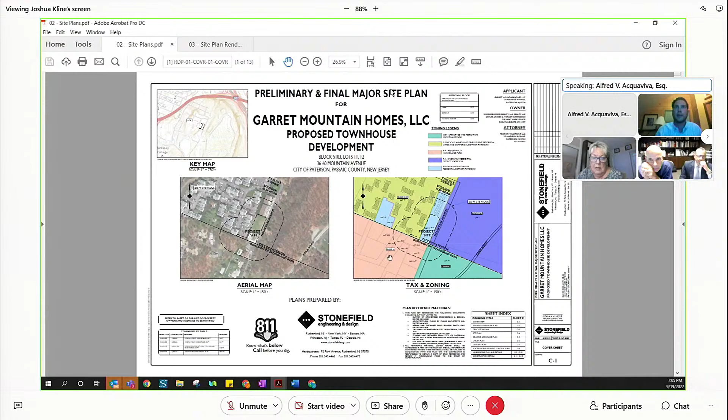This is the cover sheet, sheet C1 of the plan submitted, dated 5/4/2021. I just want to confirm I'm not planning on marking this in as it was submitted, is that okay? That's fine, that's acceptable. Okay perfect, so what I'll do is I'll zoom in now.

I think I always like to start with a bit of an overview. So myself, as a site civil engineer, the items we really look at, which tonight I will go through for the board and the public here tonight - we don't anticipate any adverse impact to the surrounding neighborhood, the adjacent properties, or the community.

I think one of the other things that's important to note in the beginning is that our office and myself are very familiar with the city, and we understand and agree, as a condition of approval, that we would work with the city engineer regarding all of the engineering elements of the design, and we would secure the city engineer's approval and all applicable permits associated with the project.

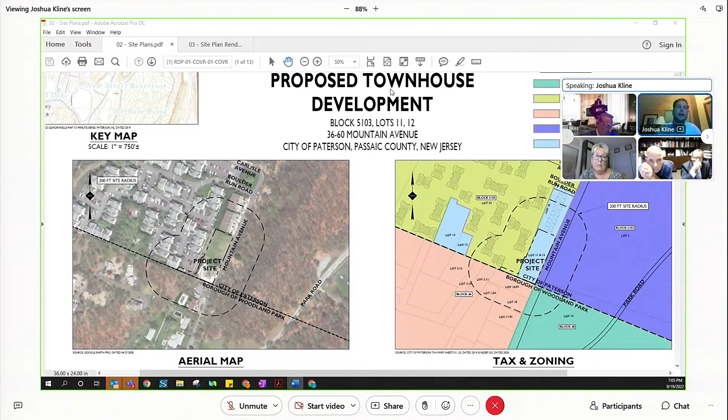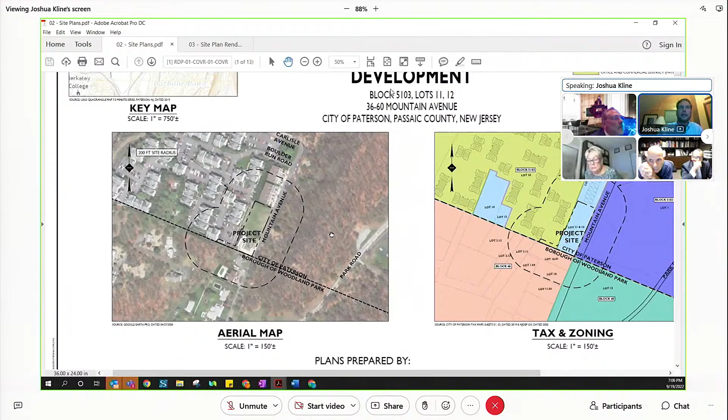So what I have up on the screen tonight is our cover sheet, with an aerial map on the left and a tax and zoning map on the right. I think we were brought through a lot of the existing conditions already, so I'll just highlight some of the key things we look at as a site civil engineer. I'll zoom into the aerial map a bit more, and I think you can see some of the items previously described.

To the left of the page, or west as I'll refer to it tonight, you can see the larger condo association. To the north, there's another townhouse development at the top of the page. To the right is undeveloped area, and to the south is the borough of Woodland Park, where you can see some single family homes scattered in the area shown on the screen.

Our site is fronted along Mountain Avenue, which we'll describe the access to further — it's a two-way street. One of the keys is that the majority of our site does not have improvements along the frontage. There's no ADA compliant sidewalk, no curbing, and no designated frontage improvements — just some old boulders and broken up area.

The site is mostly undeveloped. You can see the north half is vacant or open space, and there was an existing development described to the south. I think some of the key features to take away as we go into the proposed condition is, first, the topography.

This changes about 15 feet from north to south along Mountain Avenue — as you work your way from the top corner of the page to the bottom, there's a 15-foot drop in elevation. There's also a big elevation difference west to east. The development behind us today is about 5 feet higher at the north, and to the south it ranges up to about 20 feet higher than us.

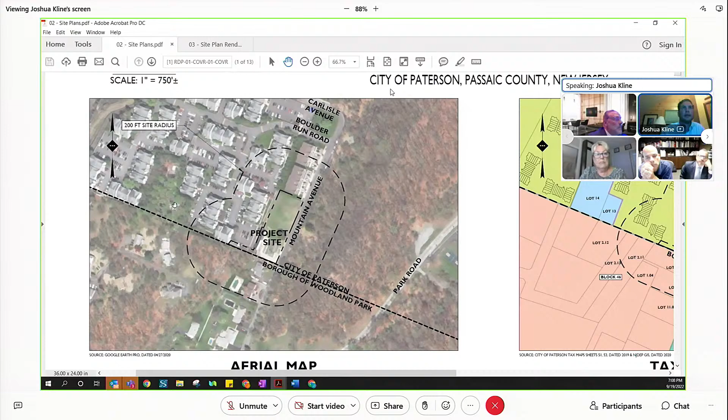So there are definitely some challenges — it's a unique site. When you look at the geometry, yes, it's a rectangular lot, but it's really shallow in depth and has a lot of grade change across it, which makes the engineering and design difficult in laying things out. Another note is there are no stormwater management facilities on site — water hits the ground today and goes uncontrolled off of the site. And I already noted the frontage condition for everyone.

So now I'll move to this exhibit, which I'll mark as A1 — a site plan rendering exhibit, dated 9/15/2022 for the record, prepared by our office. This is a colorized site plan that takes the site plan as submitted and the landscape plan as submitted, combines them together, and colors them.

I'll zoom in, and just to orient everyone — the top of the page is north, the bottom is south. Again, you can see Mountain Avenue on the right-hand side, or to the east. Just to highlight the big features: we have four buildings as you work your way north to south, building number 1 at the top, building number 4 at the bottom.

There are 2 access points along Mountain Avenue, in accordance with city standards as well as general RSIS standards in terms of access aisle width, parking space depth, and sizes. I'll zoom in to just building 1 — it has 4 units as you work your way from right to left, or east to west.

You have 2 spaces in front of each unit. You have stairs to get up into the entrance as shown, and then there is a single garage.

Our architect, Mr. Evans, will be speaking later. He'll describe the buildings in a little bit more detail, and there also will be a traffic engineer, John Corak, from our office, who will speak more to the parking, the access, and the general traffic operations of the site.

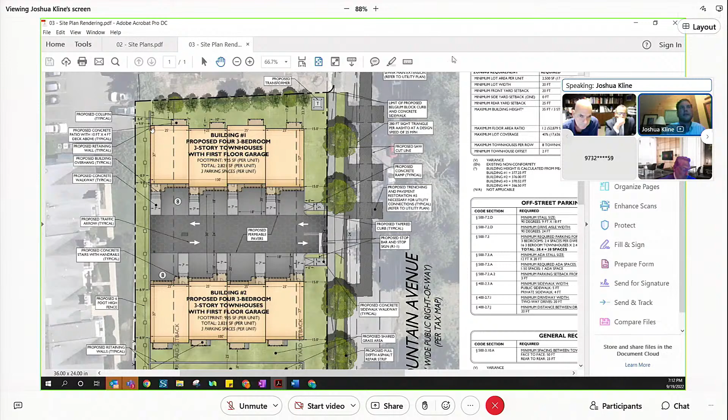As you can see to the north, we have new evergreen screenings being planted. There's a 0-foot side yard setback requirement. The applicant is 12 feet from the elevated patios' columns, but about 15 feet from the building, so there's a nice little grass area between the back of building 1 and the property line.

Again, there's no side yard setback along the bottom of the page, or to the south, but the patio and stairs are 13 feet away, and the building at its closest point is 16 feet. That creates some open space between this development and the rear property lines.

Our planner will go in depth with the variances we're seeking tonight. I am familiar with and have looked into the setback variances associated with the application. What we look at as site civil engineers when discussing setback variances is what elements we design that would be impacted.

One of the things we look at is stormwater, utilities, and constructability. Based on our review of all these items, they can all be safely accommodated, so this relief can be granted by the board, and this project can safely accommodate that from a site civil engineering perspective. We have stormwater features that exceed the requirements of the NJDEP as well as the city.

We have adequate spacing to provide utilities. Again, we're permitted to build right to the side yards, but we're not doing so. Our planner will speak more to that - I just wanted to touch on what we look at as a site civil engineer, and one of the items we noted is a little bit conservative.

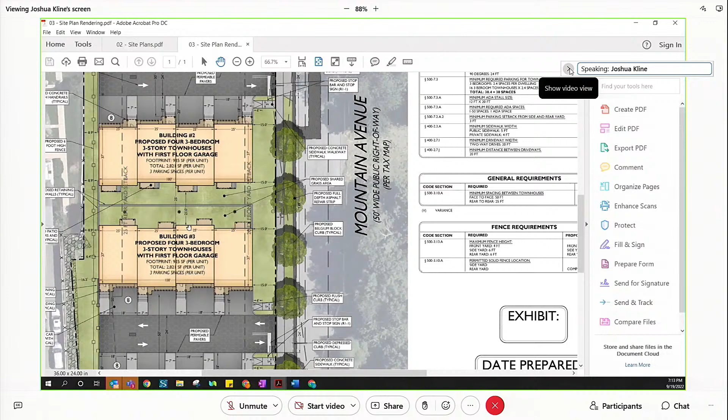So there's a 25-foot space requirement between the townhouses, rear to rear. We noted 21 feet because at the pinch point, where one of the raised patios is to the back of the building, is 21 feet, but building to building is 25 feet. So the intent of that spacing is met, from back of building to back of building.

I'll just highlight the stormwater, I'm happy to go into more depth. This is a major development, so we are subject to the NJDEP regulations that were in place at the time.

What this project looked to do is incorporate pervious pavement within the driveways. Water will be pitched in, the roof leaders would be connected, and water would be contained within these pervious pavement stormwater systems. Then through an outlet control structure, it would be slowly released. During larger storm events, water would bubble out of the grate and make its way to Mountain Avenue, which again is water that comes off the site uncontrolled today.

In terms of lighting, we are proposing new lighting as part of the project, and we are complying with the lighting requirements. I think the key here is we want to provide safe lighting for our future residents, but we want to minimize any potential impact to the surrounding areas. We're very aware that there's residents surrounding the site, single family homes as well as townhomes and a condo association.

So what we look to do is keep the fixtures very low. We don't have any area lights associated with this project. The mounting height of the canopy lights is 9 feet, and the wall sconces are 6 feet. For reference, it's very low, which keeps it at a pedestrian level.

This is all LED, it's all downward facing, and it's all dark sky compliant, full cutoff LED fixtures. The biggest key there to end with is there's absolutely no spillage on any adjacent property with the proposed lighting. Again, our focus is we want safe lighting for our future residents in the areas that they park, accessing Mountain Avenue, which is provided. And again, we do meet the lighting requirements as noted.

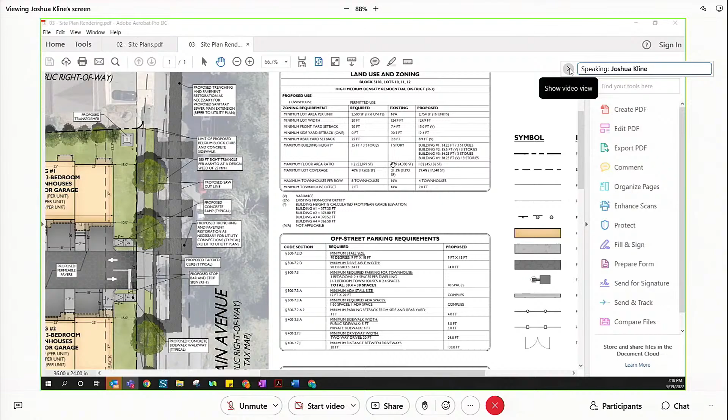Mr. Kline, there is a height variance for one of the buildings, is that correct? Correct, there is. What is the reasoning for that variance? There's a very small de minimis height variance for building number 2, it's 6 inches. There's a height variance of 3.33 feet for building number 4, and that really comes from a grade calculation. We have to calculate the mean grade around the building. The front of the buildings are all consistent, but as the site is dropping north to south, as you work your way to the back of the building, it is a little bit lower. So when you take that mean grade, there is a slight height variance we are seeking as part of the project, due to the grade, the topography of the lot. Correct, that is correct. Madam Chair, I have no further questions of Mr. Kline at this time.

Okay, Mr. Buglione, do you have any questions of Mr. Kline? Yes, Madam Chairwoman, thank you very much. Good evening, Mr. Kline. You had testified that you have a familiarity with the city of Paterson.

My focus for this question is, how many other projects have you represented landowners who were attempting to build adjacent to a park? So I don't know how relevant this is to this application, but our office did work on, I'm just pulling the name of the project we did. I wanted to focus on you first. How many projects did you personally work on for a Paterson landowner attempting to build next to a park?

Yeah, one sec, so we did. Are you looking at documents? If you're looking at documents or using your computer, you'll have to tell us. No objection, Mr. Aquaviva. Mr. Kline isn't even allowed to get his sentence out, and it's happened twice already, so if there can be some courtesy to the witness, please. I just need a second. This is cross-examination, and I have a witness utilizing a computer. Excuse me, I want to say something, okay? Because the stenographer has to take the words as they come out verbatim, we cannot have people speaking over each other or interrupting each other. So I am going to ask for the courtesy, just let the gentleman answer the question and then you can respond, please. Thank you, go ahead, please.

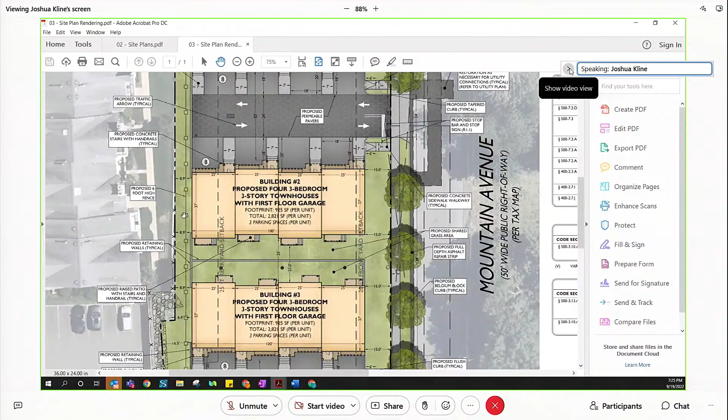There's a slight jog in the property line, so at the closest point it's 6.4 feet. To the north of the page it's 6.4. At one point it's approximately, I would say, about 12 feet away. And then as you work your way to the bottom, again it's about 6 feet away. So it's kind of inward onto our property.

Is it fair to state that there's a staggered line for the fence, and at one point it'll be 6 feet away from the buildings, and at another point 12 feet, based on that testimony? No, the fence runs in a straight north to south pattern. It's equidistant from the proposed buildings 1, 2, 3, and 4. Again, the 6 foot mentioned is from the fence to the property line, not to any buildings on the adjacent property.

So there's extra space on the other side of the fence that goes to the property line? Correct. There is a fence, and then from the fence to the west there is approximately 6 feet to the property line, and in some areas greater than 6 feet.

Does the placement of the fence restrict any access for equipment to the rear of the buildings? What type of equipment? Say a crane to remove a tree or a bush, or to place an air conditioner. I don't believe it would impact the ability to do the items as you described. How about a different scenario, would the placement of the fence hamper a fire apparatus from going to the rear of the building? No, it would not. And what's the basis for your opinion on that?

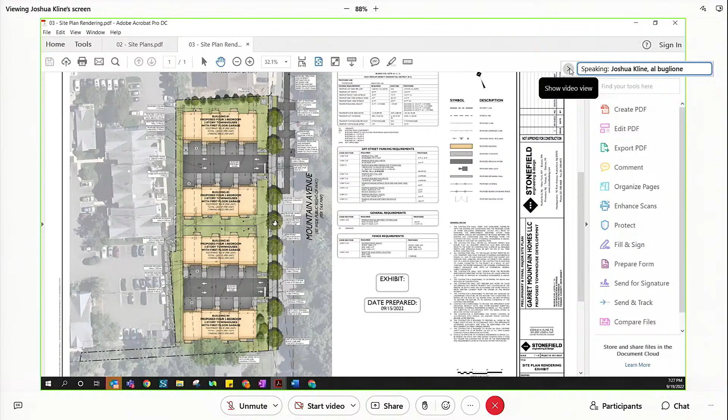Again, a fire truck would be able to safely turn into the site from Mountain Avenue, and they would be able to pull into the driveway. Again, I'm not a firefighter, I'm just an engineer, so I can't speak to how they would stage or be able to handle the situation.

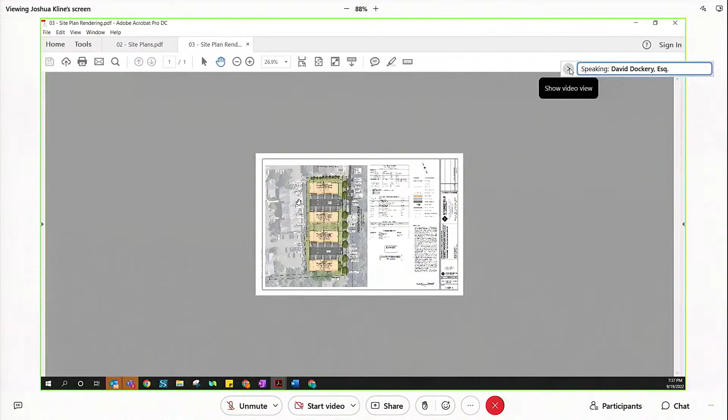Let me make sure, you're referencing the property to the north, the eight townhomes, correct? I'd just like you to compare, if you know, the difference in setback. It appears on the plans that the narrowest setback to the north of the subject development is 8.9 feet to the Garrett Heights property line. What is, if you can provide it, your opinion on the approximate setback from the rear of the townhomes to the north?

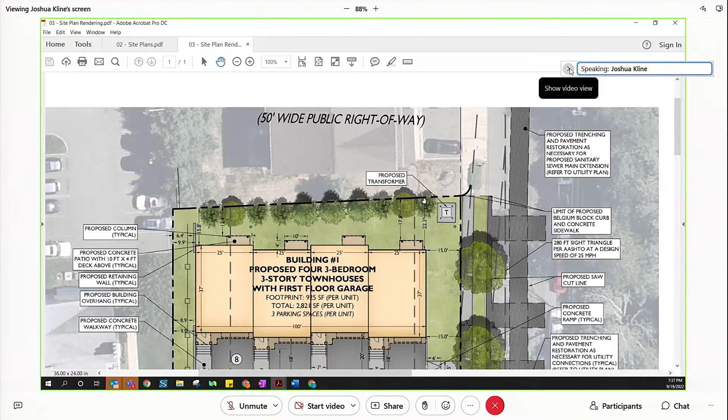Got it, so to the north, I'm just going to zoom in. That would be between building number 1. So from the building to the property at the closest point is 15.8 feet, and at the furthest point is 22.3 feet. I'm just going to check, usually I have a scale on me in person.

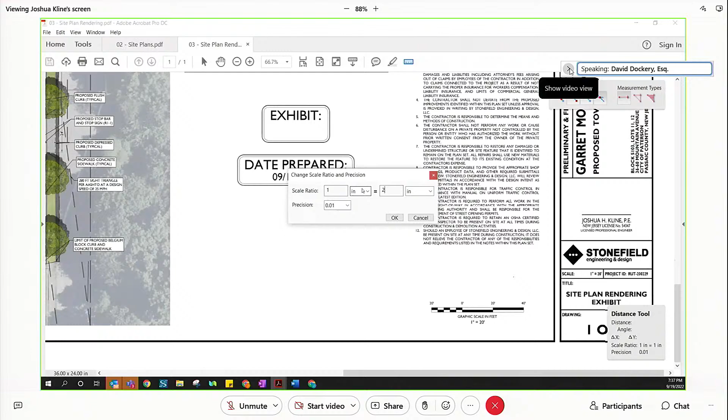Well, that's not exactly what I was asking. I was asking about the rear line setback along the Garrett Heights property line. Got it, I just want to make sure. I thought the first question was about the property to the north. Well, right, so let me be as simple as I can. If you look to the left of the subject property, the setback between the subject property and Garrett Heights property line is 8.9 feet, correct?

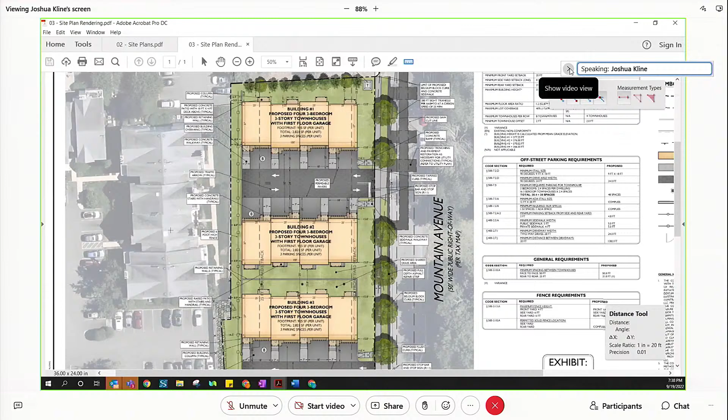Oh sorry, you're referencing the development to the west, to the left-hand side of the page? Let's say to the left, that might be easiest for our purposes. To the west, correct? Yes, yes, correct. Okay perfect, so that's 8.9 feet at its most narrow point.

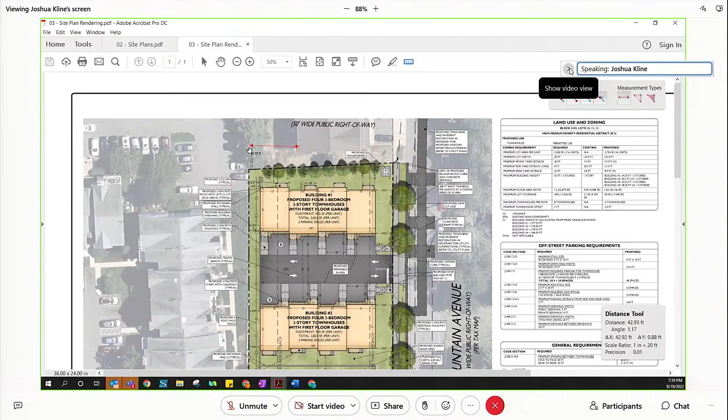So if you move north to the Garrett Estates development, would you be able to provide the approximate setback from Garrett Estates to the west? Well, I'm really not following you. If you take, maybe in a different way, sorry, if you take the back of Garrett Estates, the development to the north, and estimate the setback from the rear of that building to the Garrett Heights property line to the west, approximately what is that? Oh got it, so you're not talking about our property, you're talking about the adjacent property. Correct. Got it, it's approximately, I'd say 40 feet, 43 feet.

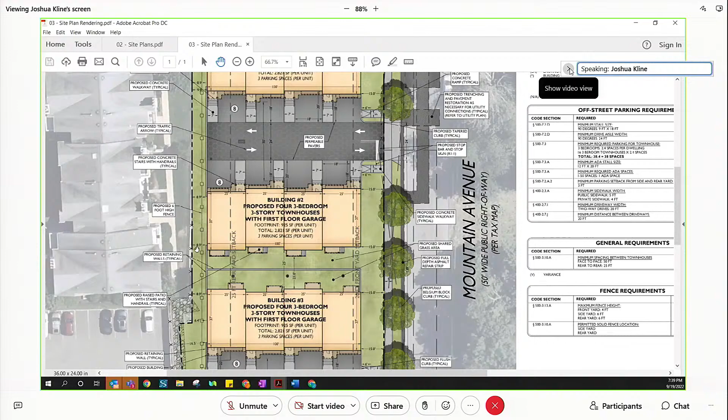Okay alright, that was already asked. Along the rear setback between the subject property and Garrett Heights condominium to the west, particularly along the most northern and narrowest part, in addition to a fence, is there any retaining wall planned for that property line? There's no retaining wall proposed on the property line. The project does propose retaining walls measured at about 9 feet, shown about 8.9 feet from the property line.

And in the current conditions of the property, there's a steep drop-off in topography from the west as you go onto the subject property. Where does that fall on the plans? Correct, so at the north corner there's about a 5-foot difference in elevation, and as you work south it ranges from about 15 to 20 feet depending on how you measure it. And so is the purpose of those retaining walls, you said the west end of the buildings is meant to serve as a retaining wall?

Is that meant to abut that topography difference, or will there be infill to transition? So there will be a slope between the property line and our buildings, the westerly facade of our buildings. So the fence will go on top of the retaining wall, so to speak? Correct, it'll be on the higher side of the parking areas.

Okay, and is there any landscaping planned along that westernmost boundary? Currently the plans do not propose any new landscaping along that fence. And is there any current screening or landscape blocking presently on the site? I don't believe there's any landscaping screening on our property that's there today. Okay, and again, I don't know if you can answer this, but if you can, great - would you be able to testify as to any logistics for construction staging for the development? I would not.

So you can even see on the north-hand side of the page, this car - again, you don't have this car now having to back out into the road. Anyone that's backing out of their driveway is doing so kind of in the safety of the community that they're in.

I have no further questions.

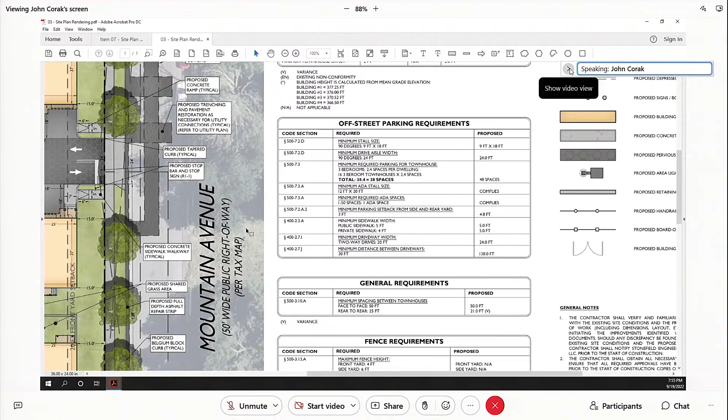Good evening, Mr. Corak. Previously, you said there was a site visit to the property. Did you make that site visit, or was it another member of your firm who made the site visit? I made a site visit, as well as another member of my firm. Can you kindly tell us the day of the week and the date that you made your site visit? I don't have the date offhand. It was a weekday in March.

We prepared this study at the... You had stated your report is dated March 31st, 2022. Would it be consistent about a week before that? Correct. Can you tell us the time of day that you appeared at the site for your site visit? It was about mid-afternoon. And how long were you on the site? About 30 minutes.

And you had told us that you used a standard for trip generation to determine there should be about 6 vehicles, give or take, per hour for trip generation at peak time. Correct. Can you kindly tell us, in your analysis, what you determined to be the peak time for trip generation? Yeah, so the peak hour, regardless of the specific window it happens, generally speaking we look at a 1 hour period between 7 a.m. to 9 a.m. and a 1 hour period between 4 p.m. to 7 p.m. So the trip generation associated with the project would fit into the busiest hour within that window.

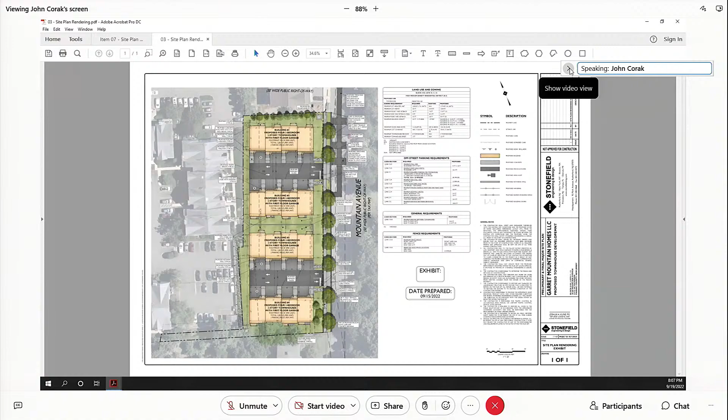Yeah, so what we like to do for these planning board presentations, to help the board and the public understand what's being shown on the screen instead of just black and white plans, is take that site plan document and provide color on it. That way you can differentiate the buildings, the driveways, the landscaping areas. All of those components are easier to see, but dimensionally and from an engineering perspective, this plan is exactly identical to the site plan sheet that was part of the package submitted. This is the site plan sheet, C4.

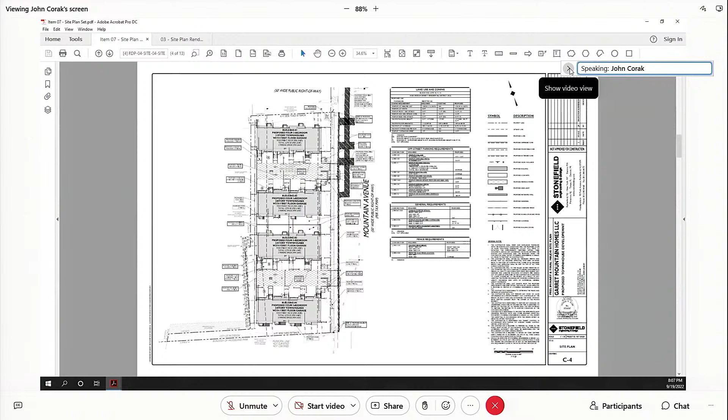So is it your testimony that, aside from the color shading, the plan in front of us right now, prepared September 15th, 2022, is the exact same plan that was submitted to this board in support of the application? Yes. Thank you, Mr. Corak.

Mr. Buglione, your objection is certainly noted. I believe he's cleared it up, I'm not sure to your satisfaction, but he's cleared it up. No, we're going to make a motion to dismiss the application as incomplete, and it can be resubmitted. We feel we would have to study this more. There's no reason why we weren't provided this particular document, especially given it was only prepared 4 days ago. But I do understand, Mr. Acquaviva, I just wanted to state that for the record.

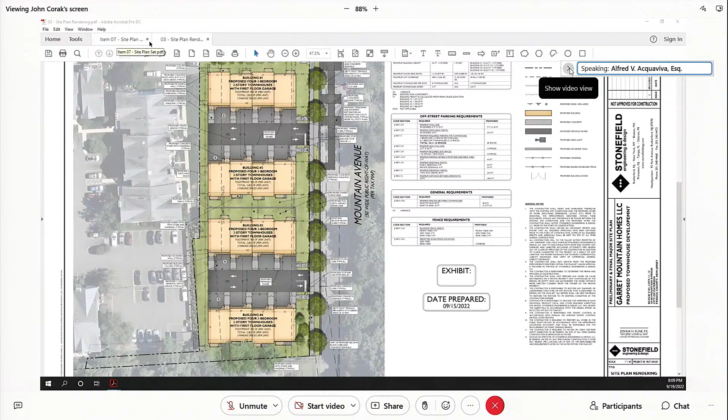I'm looking at my notes here. Mr. Guzman has two more witnesses, I believe. Yes, that's correct. Okay, but actually we're going to take questions from the public at this point, I'm imagining.

I am going to take questions on Mr. Corak's testimony. I also understand that we have one person who has a question for Mr. Kline, but I will save that for after the questions of Mr. Corak. So at this time, if anyone in the public has questions, only on the testimony of Mr. Corak, please call in at 973-321-1579, Meeting ID 711-680-001. I will allow two minutes for call-ins, three minutes for questions, and the questions must be to Mr. Corak based on his testimony.

Do we have any callers that want to ask Mr. Corak any questions? Madam Chair, I have two callers that will call in. We'll call them by name and ask if they have any questions.

Miss Monica Herschel. I don't see her name up here on the screen. Her name is Monica Herschel. Okay, is she on the line? That's what Ryan said. We must have lost her. We'll get back to her, see if she comes back on.

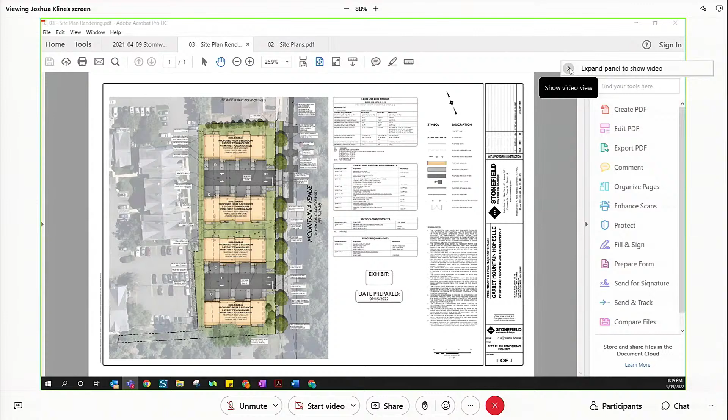Okay, and I'm going to ask Mr. Kline if he can electronically sign them and email them to me, and I will add it as an exhibit to the file. And if you send me a copy, I'll attach it to the transcript. Yes, I will. If possible, if you could print it out as well and mail it to me, an original. We will send hard copies as well as the electronic versions.

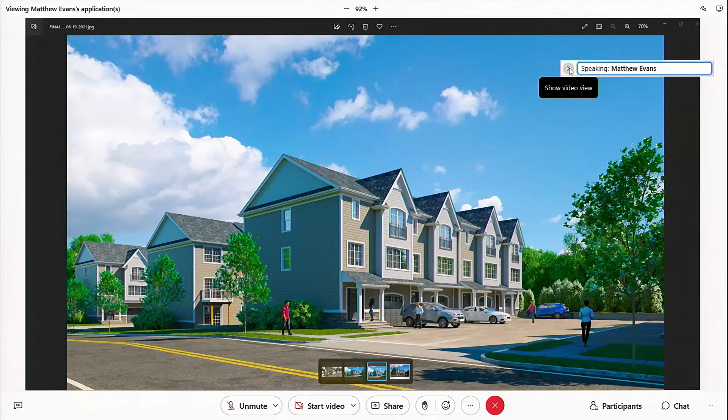Okay, I'd like to start off with the rendering that we've done for this project, which we've submitted as part of the application. Let me see if you can see it. Yes, we can. Okay, so this is basically looking at it from Mountain Avenue. We have the townhouses, 3 of them shown. This would be the upper driveway to the right side of the rendering, illustrating the materials and the scale.

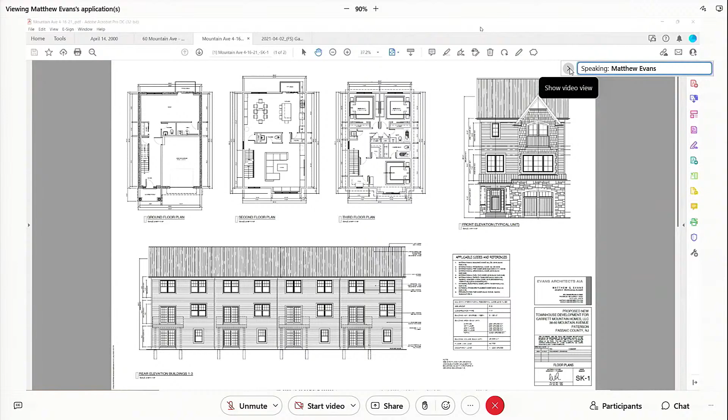I can also share the architecturals. Give me a second here. Okay, so we have a two-sheet submission, SK1 and SK2. Those were submitted as part of the application. Let me get the date from the right. 4/16/21. So looking at the sheets, we have two sheets, SK1 and SK2.

Looking at the units, they are typical. Each townhouse is basically a single family townhouse, so from the ground to the sky it's one unit, consistent with normal townhouse design as a single family dwelling unit. We approached it as townhouses because we felt that the townhouse design is similar to the townhouse style of the neighboring properties, consistent with the scale, density, and character.

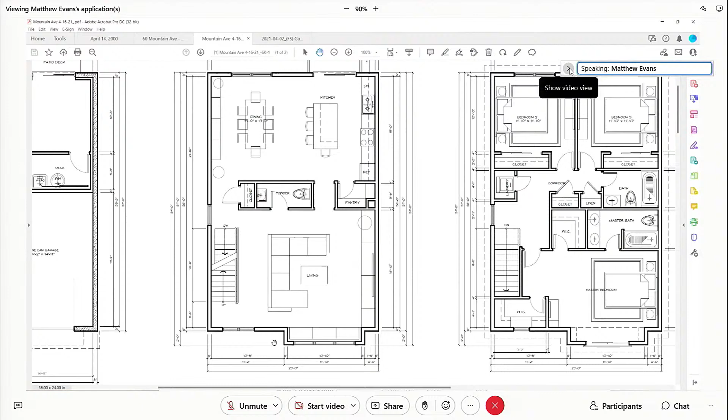Going to the next plan, the second floor plan, you come up the stairs and enter into a large open living room. We have a powder room, a pantry, and in the rear section of the townhouse, there's a large open dining room and a kitchen with a nice island and seating around that, and we have the kitchen cabinets on the right side of that.

And we have a deck also from the kitchen, a little 4-foot deep deck that goes outside for the kitchen area. We have the top floor, that's the 3rd floor plan.

You come up and we have a stackable laundry room. We have 3 bedrooms. So all those bedrooms, we show the furniture in the bedrooms, so you can see how it can fit a queen-size bed in all these bedrooms, along with night tables and bureaus, etc. We have closets, ample closet space for each of these bedrooms.

And then we have linen, a regular closet, and then we have a shared bathroom for those 2 rear bedrooms. And then in the front, we have a large master bedroom with walk-in closets, 2 walk-in closets, and a master bathroom with a tub, toilet, and 2 sinks.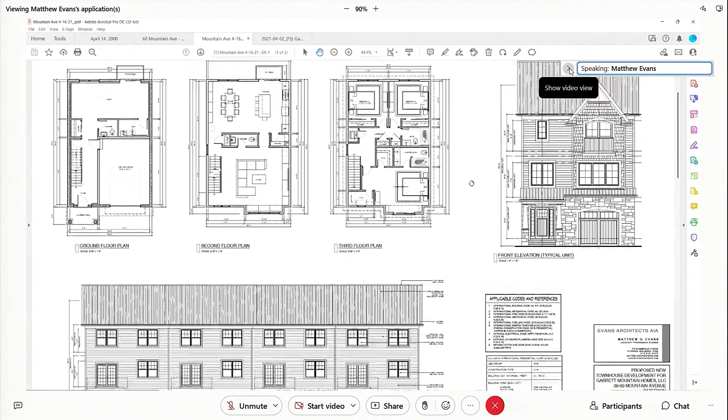Looking at the elevation, the front elevation of a typical unit, let me go to that. So you can see how we mix the materials. We wanted to give it some aesthetic appeal. We have a mix of shaker style shingles, and then horizontal clapboard siding, stone veneer on the ground level, along with a craftsman entry and a craftsman garage door, along with those aesthetic improvements on what we're proposing.

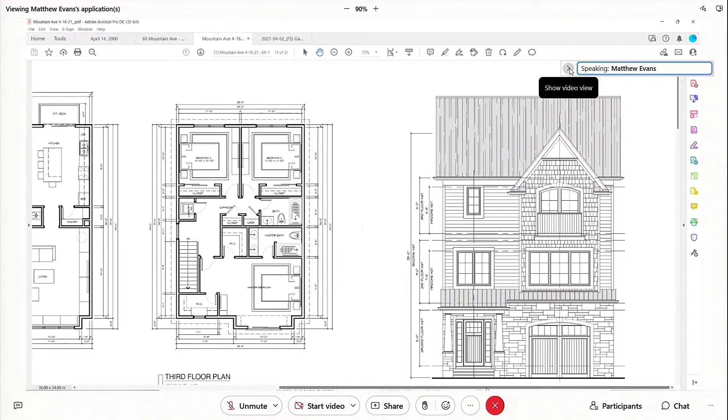Going down the page, we show the rear elevation of buildings 1 through 3. And as I mentioned, we had the deck, the patio, and then the deck above for the rear sections of those. One thing I didn't mention is that all these units, every other unit, will be stepping 2 feet.

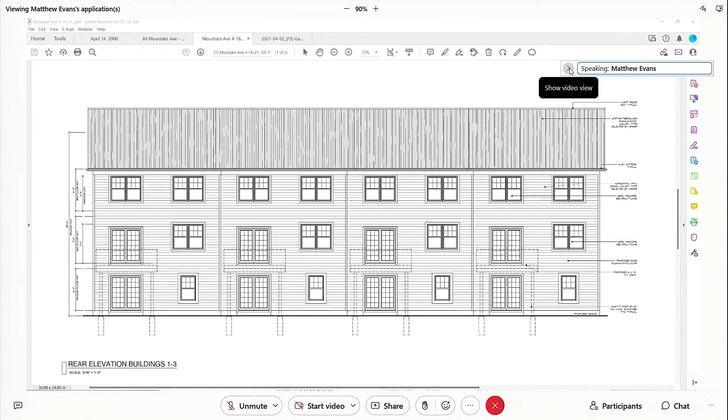So it breaks up the facade. And as you saw on the rendering, it would step back 2 feet to give it not a monotonous look, but to give it more aesthetic curb appeal character.

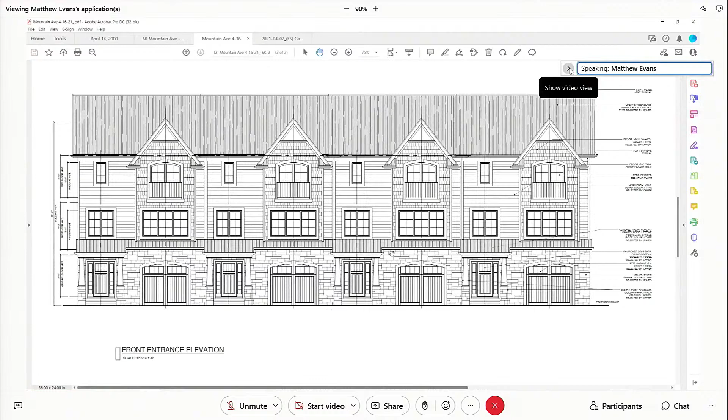Looking at the front entrance, that shows the 4 units together, and shows how the materials and the scale of those buildings complement each other. I think then we just show the side elevations. The left side elevation and the right side elevation are pretty similar in character.

Now, with the difference of building number 4, where it was mentioned previously about the elevation change, due to the elevation it's a little taller in the rear of that unit, with that block there. So we would have some steps going up to that level for the ground floor level on that one.

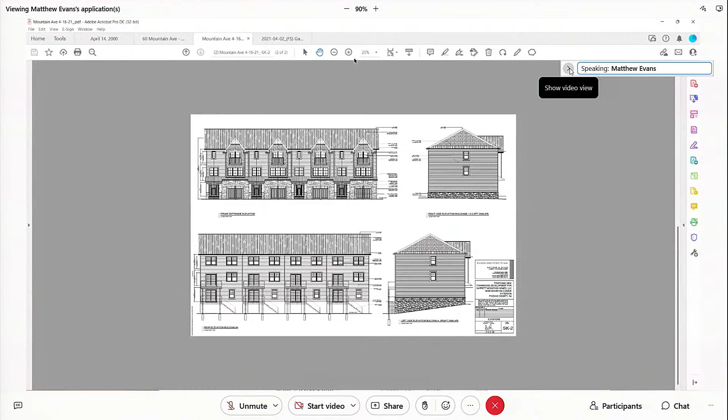So looking at that, those are basically the 2 sheets submission showing the preliminary architectural plans for the development. That would be consistent with all 4 buildings, those plans and elevations, and also the rendering.

So, Mr. Evans, there was a previous question regarding construction staging. Would you be able to comment on that with this project?

I don't know exactly how, but it's standard construction. I don't think there would be any impact on the neighboring properties. A lot of these developments that we do in Paterson consist of 0 lot line conditions, mostly downtown or in the denser areas where you need to shore up buildings or other conditions. This, I believe, would not negatively impact the surrounding properties and would be standard construction.

We've done similar townhouses built in North Haledon and Ramsey and other parts of New Jersey and Waldwick, and this is consistent with those types of units. We've never had any problem during construction with these. They're single families, so I don't see a problem with it.

Okay. Thank you, Mr. Evans. I have no further questions of Mr. Evans.

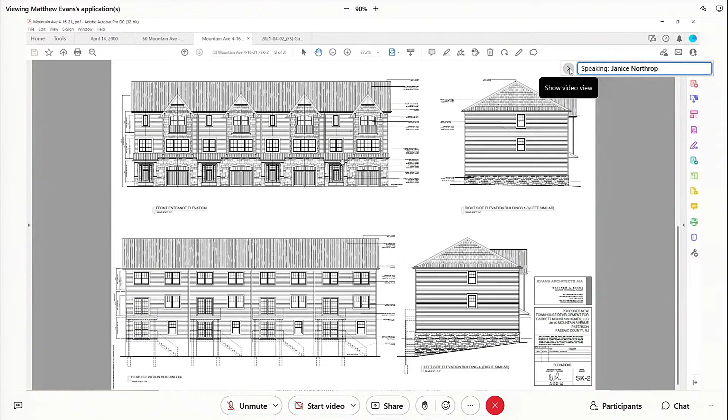Okay, so I'm going to open up the questions. Mr. Baglione? Yes, thank you very kindly. Good afternoon, rather good evening, Mr. Evans. Can you kindly tell us the square footage for each unit that is proposed tonight? Okay, hold on, let me go back to my...

Okay, I did gloss over it. I could share it again. You could give us the number. Do you want the number? All right, so they're all the same.

The garage is 286 square feet. The first floor, without the garage, is 639 gross square feet. The second floor is 948 gross square feet. The third floor is 948 square feet. And the total is 2,821 gross feet for each unit. So that meets the minimum requirement for a 3-bedroom, which would be 1,100 square feet. We meet or exceed that, with 2,821 square feet.

What is the square footage for the entire building containing 4 units? So let me get that, we'd have 2,821 times 4, which is 11,284 square feet.

My first set of questions revolves around the first floor of the unit. If you need to share the screen or not, that's up to you. But I thought in your testimony, and I thought I saw on the plans, that the room called the study has a closet off of it. Is that correct? I can share it just to give clarity. Okay, let me try and zoom in a little bit. So yes, there is a closet.

There's 2 closets down there, and we like to provide as many closets as possible. It's always good to provide a lot of closets in a unit. And that study has a little door out the back, but it would just be limited to quiet enjoyment of the unit. It could either be used for additional storage or recreational room, because we only have a formal living room, and it might not be conducive for more recreational use on the ground floor.

So in other words, if you can answer the question, how easy would it be to convert this into a bedroom? Objection - that's not what we're proposing here, and we can't keep track of everyone who's going to break the law. These are legitimate questions, Mr. Acquaviva. Mr. Berglund, could you just repeat your last question, please? It was co-counsel's question, I was just... Oh, I'm sorry, Mr. Dockery. Can you? Please.

Mr. Dockery asked. Let me see if I can rephrase the question.

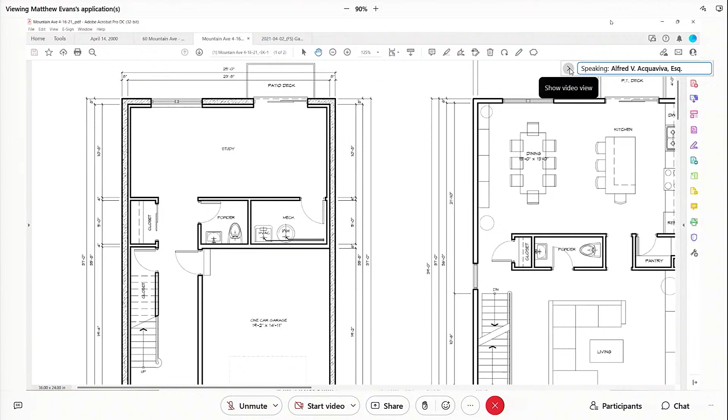Okay, I'll move on. Are there any doors that would separate the first floor entryway from the upper levels? No. So as soon as you walk in the front door, let me see if I understand this correctly - there's this hallway, you can either go back to the study or go up the stairs to the main living area, and there's no doors or separation whatsoever. Right. So this is a higher end residential unit, a large unit, which we've proposed, and we see this as being used as a one-family unit, and that would be how we've designed them, as I mentioned, in other municipalities, and it's been very successful. I believe that it would only be conducive for one family.

Have you, in your experience, designed successful projects in Paterson that have utilized this sort of size, particularly a 2,000 square foot, 3-bedroom townhome? We just did townhouses, we just got approved recently for townhouses at the Board of Adjustment on Dixon Avenue, which is a little further away. It was a 50 by 125 foot lot. We had 4 townhouses on it, similar in character to this, and that was brought to the Board of Adjustment.